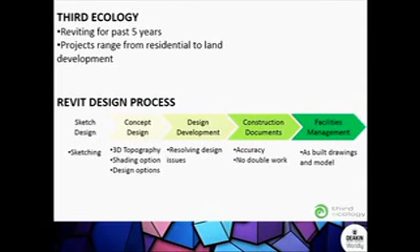So the project I'm going to quickly go over is the Chilwell Primary School, done in 2011. It was one of Third Ecology's first BIM projects. When I say BIM, it was actually working with John from Wood & Grieve here, who was the engineer on the project, together in this virtual space.

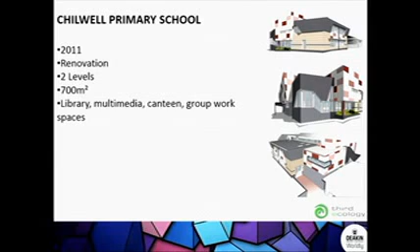I'll show you how that helps the process as we go along. It was 2 levels, about 700 metres square, so not a massive project, but somewhere to start in Revit. It consisted of, for example, the library, a media space, toilets, canteen, and connection to the existing building.

This example here is a really simple floor plan that isn't just used in this presentation - it's then recreated and used in construction documentation and things like that. And the little camera - I think most of us who aren't studying architecture or don't have construction knowledge of buildings can struggle to read floor plans. The ability to use a tool like Revit to see the building from different perspectives and different views of what you're actually purchasing as the client is highly beneficial.

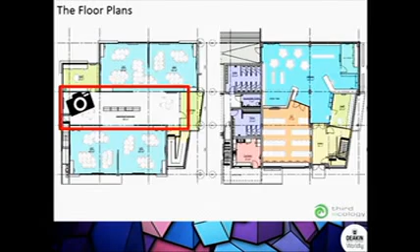If there are people in industry here, don't be afraid to show your clients the 3D model. Don't be afraid to sit with them and take them through it, because you can create drawings like this - we've got the little camera of that corridor, and what was just 2D was instantly 3D. You can see this model is quite detailed - we've got the electrical, the structures, the furniture, everything you'll see in real life. I think we've got some more real-life demonstrations to show you again today.

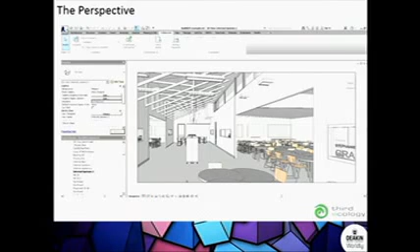So why combine models with the architect and the engineer? Why does it help? It prevents conflict - it prevents things that aren't picked up and aren't foreseen in just 2D documentation. I'll do a quick run through of how this project did help in that aspect.

I personally wasn't on the project, but I've dissected both models. You can see here in pink we've got the ventilation running through the ceiling, and that's all done in 3D and can also produce 2D documentation as well. And in Revit you can actually focus on specific areas.

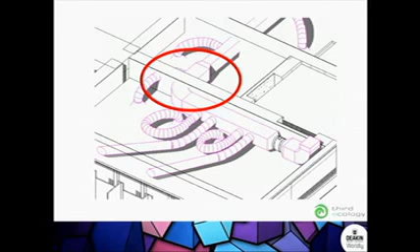You can see here we've got a clash. Ideally we'd put a hole in that wall to allow that duct to go through, but for the sake of the project, maybe it was a beam or part of the structural model that we really needed to address, and that duct had to go under, over, or around. So you can pick up those clashes not just by eye, because this is a small project. We're only focusing on that small bathroom area.

Imagine this was a hospital. Imagine all the construction, structurally, HVAC, everything in one model. You can't go ahead and check every little aspect. So in Revit, we've got an interference check.

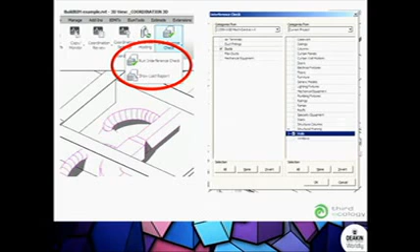We can run two models against each other, for example the architect's model and the engineer's model, and check different aspects, like ducts clashing with walls, or ducts in the structural project to make sure there's no interference. Revit automatically, very intelligently, picks up these two models and the elements you chose and addresses those clashes.

It takes you exactly to where it is. Again, imagine this in a hospital project, it'll take you to that pinpoint. You can then address that problem and rerun the test to make sure there are no clashes.

This is something you can't do in 2D documentation. That's why building information modelling is going to be the way of the future, and starting today with you guys coming to this talk is a great step in your careers.

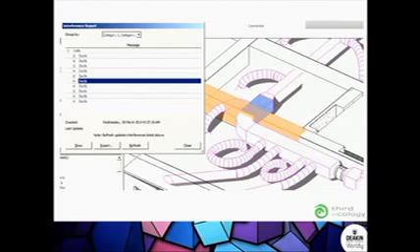So we'll go on to John now. John's from Wood & Grieve. He's the engineer on the Chilwell project. I think yours is. Yep. But he's going to talk about more engineering projects. You can use this, so you can use this. Yeah, that's fine. G'day.

Okay, so I guess I was going to talk a little bit about Wood & Grieve engineers, BIM and Revit experience. I'll start with a little bit about me and Wood & Grieve, where we've come from in BIM and Revit, some case studies and experiences we've had as a company, and probably some challenges and opportunities we see going forward.

So, me, John Lucchetti. What do I do? I run the hydraulic and fire services team at Wood & Grieve. I'm also an associate there. For anyone not familiar with all the facets of engineering, basically that means I look after all the plumbing systems in a building and all the fire systems like hydrants and sprinklers, and that's what we design.

A bit of my background and how I'm involved today. I started my university career here at Deakin and then finished it up at Melbourne Uni, so there's a bit of a local link. I did some study in Warrnambool.

What am I passionate about? I sit on the board of the AHSCA, the Consulting Engineering Society for hydraulic engineers, and I'm really passionate about prefabrication and modular construction. Within Wood & Grieve, that's my little niche, and I tend to lead up a lot of our modular projects.

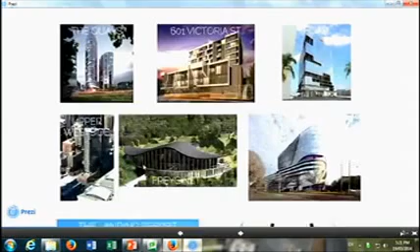What sort of projects have we worked on? Stuff like high residential towers like The Quays, or lower rise big residential developments like 601 Victoria Street, office buildings like the 5-star Green Star building in Footscray, Upper West Side where you've got circa 2,000 apartments in a small city block, the Freycinet Resort in Tasmania, which is an ultra high end hotel, and the VCCC, the big hospital going in opposite Melbourne Uni.

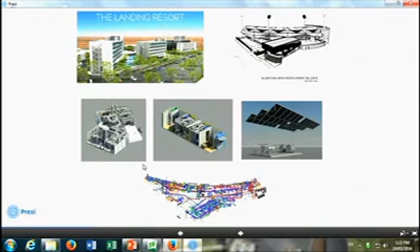The other sort of stuff we've done is the Landing Resort, a modular project designed and documented, with the modules built here in Victoria and rolled out to northwest WA. Blundstone Arena is a project we're working on right now. Below we've got some imagery of the Revit work relating to those projects.

So a last little bit about us. Wood & Grieve, we're a national company. There's over 400 of us, operating in just about every state other than South Australia and Tassie, which we service out of Victoria.

Sort of things we do in the engineering space: mechanical, which is HVAC, electrical, lights, power, comms, AV, all that sort of stuff. Hydraulics and fire, which I've spoken about, fire protection, structural engineering, civil, acoustics, property asset management, specialist lighting, and VT, which is lifts and escalators. So, Revit and BIM experience.

How significant is Revit as a documentation BIM tool in the industry? It was one of the things I thought about when preparing this presentation - what's it really meant for Wood and Grieve being involved in this? We started down this process in 2008 on a job at Melbourne Airport where we were doing a baggage conveyor, and an architect sent us a 3D model which we knew nothing about. That's when we started the journey on Revit, and we quickly learnt it was a fairly steep learning curve.

For those in the room with an architectural base, I guess the architectural side of Revit has always been well ahead of the MEP or engineering side, so we've always struggled to get the technology there to draw the pipes and ducts and structure with the same efficiency as the architects, but we think now it's getting fairly advanced.

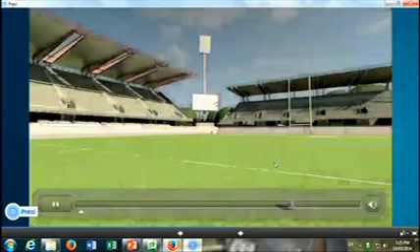I'll give you guys a bit of a walkthrough of what a Revit project looks like. It's a 7,000 seat stadium in Perth, rectangular stadium for rugby and soccer. Cox were the architects and Wood and Grieve were the engineers on the job.

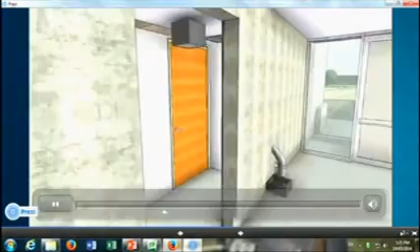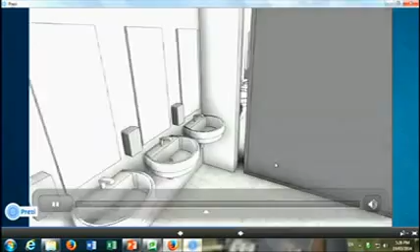So you can see just how much goes into building a Revit model, all the services tucked in and coordinated, all around trying to build the spatial coordination. What that allows us to do is have less variations during construction, tighter coordination - architects always like to get that extra inch of ceiling space if they can. So there's no point having really big bulky service zones if that can be better coordinated in 3D before it ever gets to construction.

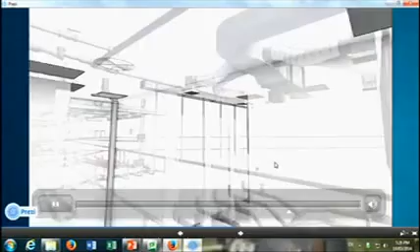So what you can probably appreciate is the level of detail and coordination that goes into building one of these things, and how much we can save our clients by doing things in a way that reduces waste once we get out into site. This is an overview of the stand and just the extent of how much goes into building one of these models - there's literally thousands and thousands of components in one of these.

The next example I wanted to talk about was the Landing Hotel in WA, which became the Bendigo Hospital Hotel in Victoria. The Landing Hotel was a 235-room modular hotel designed and documented in Revit for construction and production in Victoria, with delivery and installation in the northwest of WA. We did this work with a company called Hickory - they were unitised builders who use Hickory building systems.

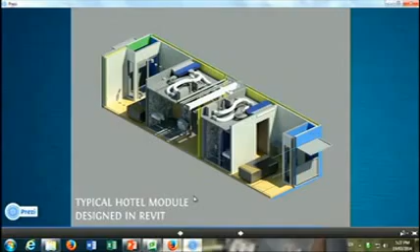I'll show you some images - basically each module looks something like this, about the size of a container. Never call them containers though - anyone involved in that industry absolutely despises the term. But this is about the size of them.

So what happens? Modular built project, highly coordinated. We've designed it in 3D. All the panels are being done in a factory using lasers. It's really smart, no waste. Well, BHP decides we'll pull $50 million out of the project and it's not going to go ahead anymore. So now you've got a whole heap of boxes landed in Western Australia that you've got nothing to do with.

So what do? Well, it's modular construction. Let's redeploy it. Let's put it somewhere else. So where is that somewhere else? Well, we decided that'd be the Bendigo Hospital. So there's a hotel going in there, an Art Series hotel, which is basically the landing hotel redeployed.

Guess what's the benefit of Revit? In having that close control over the documentation, that high coordination, what we're allowed to do is when we have to redeploy that, it becomes really easy to modify, change, and look at how we can adapt what's been designed in an existing configuration and restack it basically to be something else.

Now, I guess the coordination in going from centralised plant through existing modules that are built and have all their ducts installed in the factory is quite an immense task. One of the unique things about this project was actually having to prefabricate all the services into something before the central plant was ever built and installed, because normally you'd start with one bit and run it through.

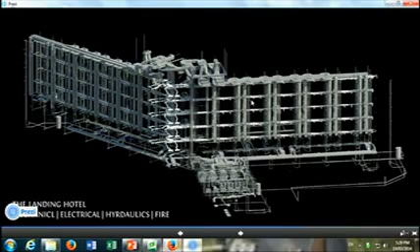What did it look like in the factory? Something a little like that. It's a rolling production line that we use there, and basically it's probably a lot more like car manufacturing than it is to traditional construction.

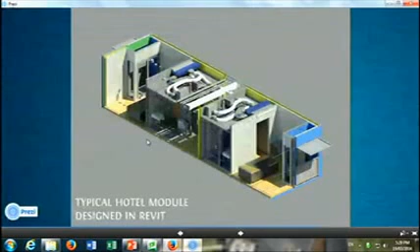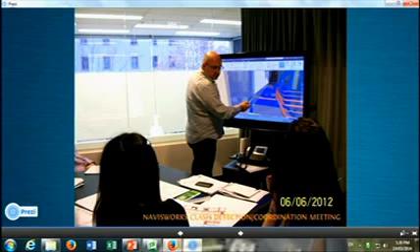That's what it looked like in Revit, with all the services included and all the finishes done. And talking about coordination, that's our architect on the job, Gary Wolfe, sitting in the Wood and Grieve office running through a program called Navisworks, where we do exactly what Charmaine was talking about, turning on all the clashes in the job and running through one by one, working out all the bits where it didn't work and we needed to change it, as opposed to them happening through RFIs with builders.

Oh, got music for this. So this is what it looks like going together.

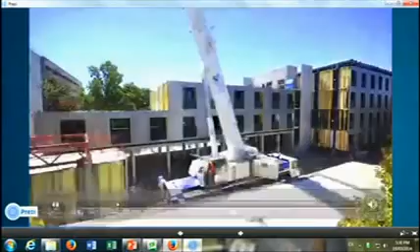So reasonably impressive stuff, I guess. That project's just about to be finished. We're coming close to the end of it now, so apologies for not having any glamour shots at the end of it, but you can see it's looking a lot like what the Revit model started out to be.

And I guess the last one I was going to touch on as a case study is our office fit out. At Wood and Grieve we believe in practicing what we preach, and so when we decided to take up 1,200 square metres in Bourke Street, we decided to do the project in Revit, which really shows that right from a small scale to the really big scale, this stuff really works.

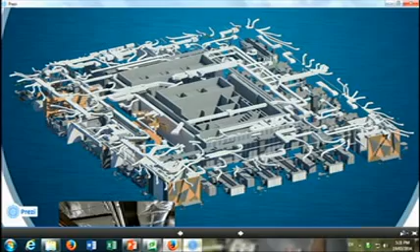It has significant savings in the phasing that we use. In this instance, what we've decided to do with our fit out is, because we've got an engineering company, we thought we'd pull the ceilings out and leave everything exposed, because we like looking at that stuff as much as some other people don't. So there's some progress shots of our fit out going in, and what we've done is actually modelled all of the existing services in Revit so that we can connect all the extensions and basically get our fit out done.

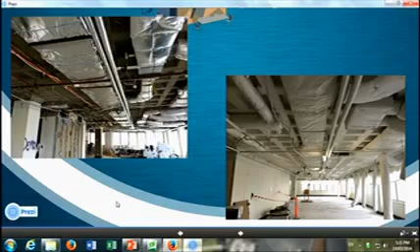So the final thing I wanted to touch on was what we see as probably the challenges and the opportunities for Revit going forward. I think one area that needs development will be industry standards. At the moment, everyone's going about Revit in their own different ways. Each architecture firm, each engineering company has their own internal protocols and standards for how we do it. We all think they're pretty good, but I think the industry will benefit from having one set way to do it, that we can each pick up other people's workflows and take off with them.

The workflow is really important in Revit, so a lot of time and effort goes in, because you're drawing in 3 dimensions, a lot more information goes into every model that's done in Revit. So one thing we found as a business is it's really important to know how much detail to go to at what time, so you can get the best results and you're avoiding rework. Maintaining model continuity.

One thing we found, linked to point 2, is having one consistent model throughout the project instead of creating dummy models, throwing them away, and starting again. Like an SD model taken to 60-70% design, then going full doc, throwing away that schematic model and starting fresh. That's really time consuming and inefficient.

One of the great things is by having robust models with the right information, you can continue that all the way through, and it doesn't stop at architecture and engineering. It's having a model that can be picked up by the head contractor, who can manage it through, do their shop drawings, and do their duct takeoffs and pipe takeoffs from it.